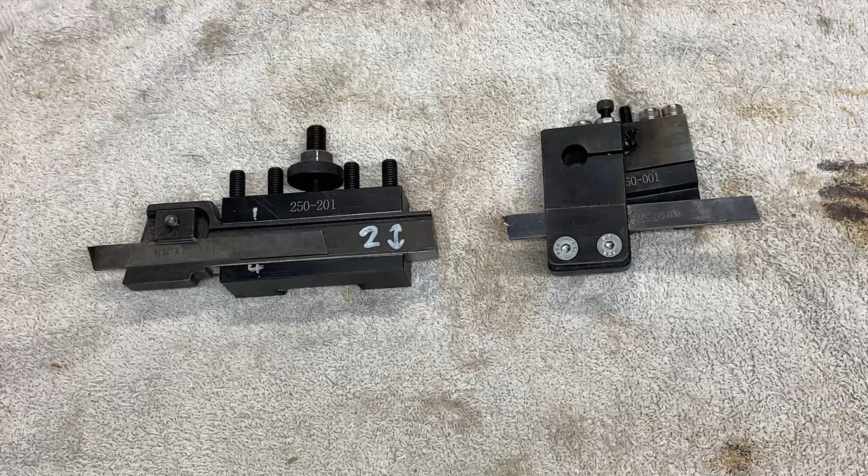Alright, back to the video and what we're doing today. This is my parting tool setup for my larger lathe. It's a made in England Eclipse parting tool holder with a parting tool installed here, and it all fits into a quick change tool holder.

Now I've got to say, this parting tool is absolutely hopeless. It doesn't cut, and I'm very cautious on how much I wind that hand wheel in on the cross slide, because if it does dig in, then I'm sure it's going to cause some problems. Now, I think the issue is the stick out here. It's a very long stick out, and I think there's probably some flex at the end of the tip, and that is why it doesn't cut into the steel that you're turning.

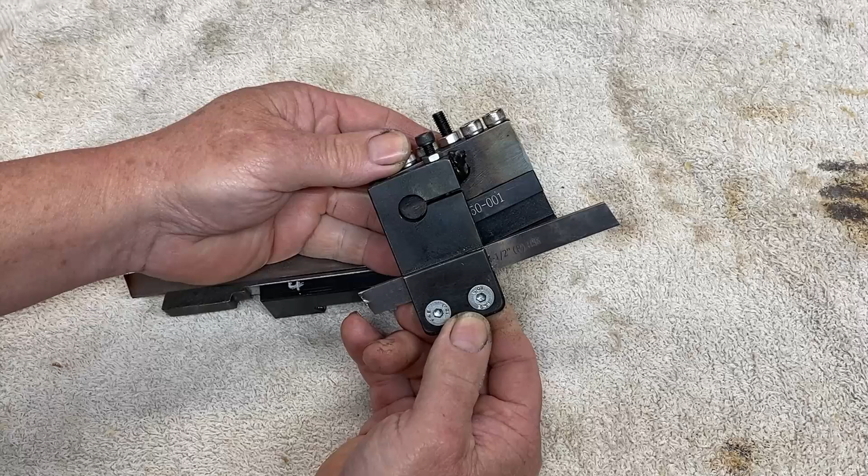This is my homemade parting tool for my smaller lathe, and I have to say this works absolutely perfect. This was a design from Mark from Winky's Workshop. I'll leave a link in the description. Again, it's on a quick change tool holder.

The unique thing about this one is it has this hole with a slit in here, and that gives the bottom piece some flexibility when you're cutting. So this gap here will close up when the cutting tool starts to dig in, and that cutting tool will then start moving away from the work, and then you don't get those dig-ins. A really good design, and as I said, this tool works brilliantly.

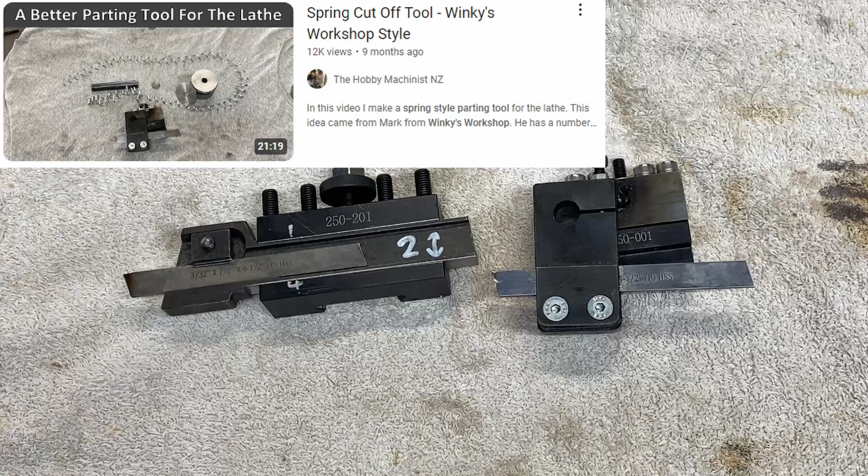I do have a video on building this parting tool, so I'll leave a link in the description below. So what I want to do is make one of these style tools for my larger lathe.

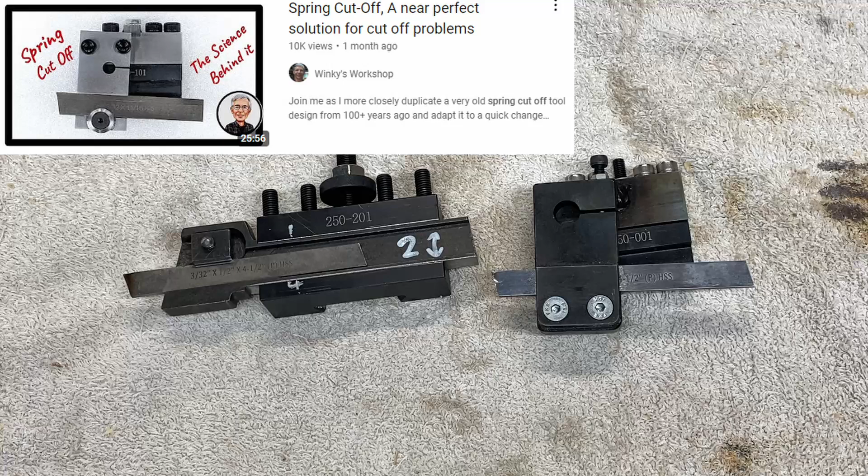Now it just so happens that recently Mark had done an updated video, and he did a lot of testing on different homemade tools like this and whereabouts that hole and slit are on the tool and how they perform. So he did a whole lot of experimentation, and he worked out the optimum position of that hole and that slit for the tool to work the best.

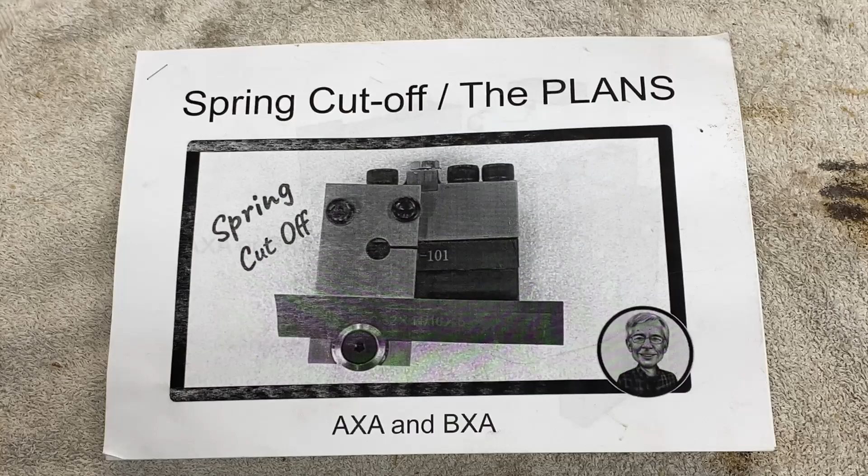Another thing is Mark provides the plans to build this tool for free on his website. So again, I'll leave a link in the description. The plans are all there. Unfortunately, I'm in metric, but that's not a problem. We can convert these measurements. So again, the full credit goes to Mark, and let's get on with the build.

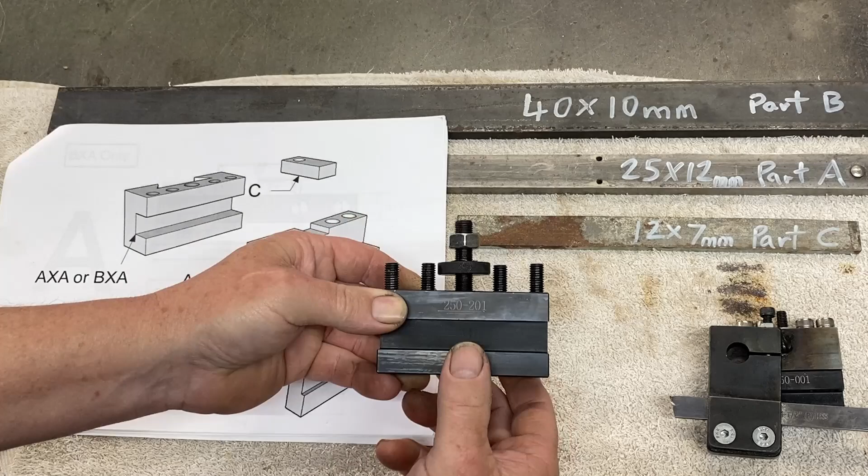I've sourced all of the parts and materials. This is a BXA tool holder. It's 250-201, and you can see here how much bigger it is compared to an AXA tool holder.

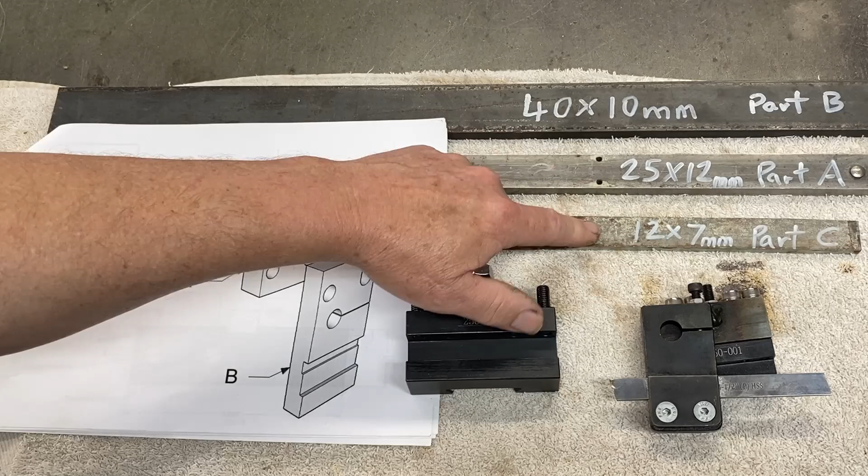Now the materials for the build, for part A, I have this piece of 25 by 12 millimeter steel bar. And for part B, I have this 40 by 10 millimeter steel bar. And for part C, I have this 12 by 7 millimeter steel bar. I need to make this a bit more narrow. It's wider than 12 millimeters.

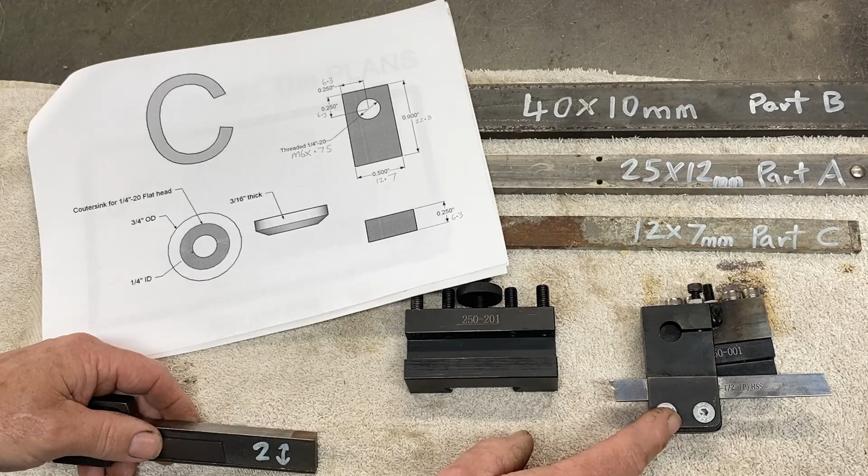Now, when we get to putting the blade in, I'm going to have to do this a bit different to what Mark's done here. And you can see I did something different on my existing tool holder. The blade I'm using is different to what Mark has, so I will probably have to work out what I need to do here once we get round to that part.

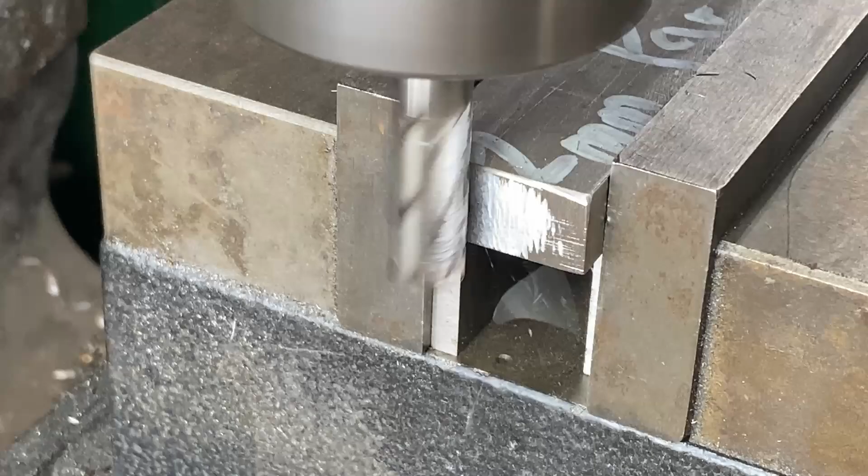I'm starting with part A, and I'm cutting off this piece at the end with a rivet in it, and I move across and cut off a piece slightly longer than what I need. The cut ends are cleaned up in the mill, and this is milled to the correct length.

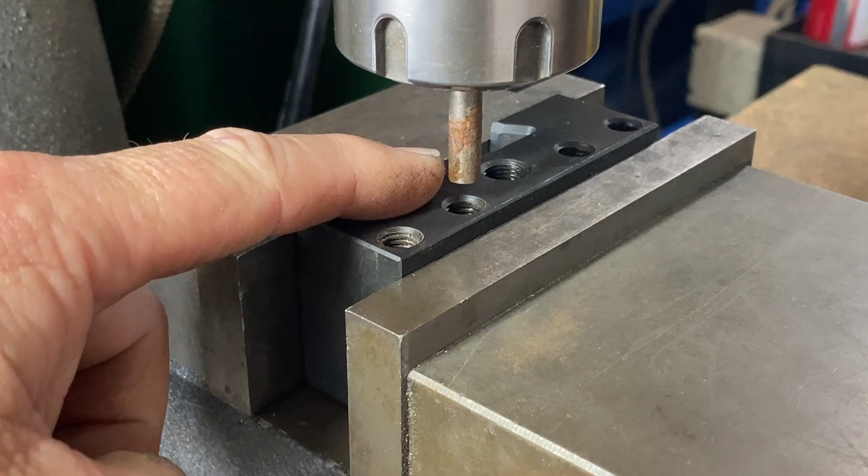I'm verifying the distance from the front edge here to the centre of the holes. Mark did not have a BXA tool holder, so he wasn't too sure on these measurements. However, his measurements were accurate, and I've noted them all down here in metric, so I'll use that for the next process.

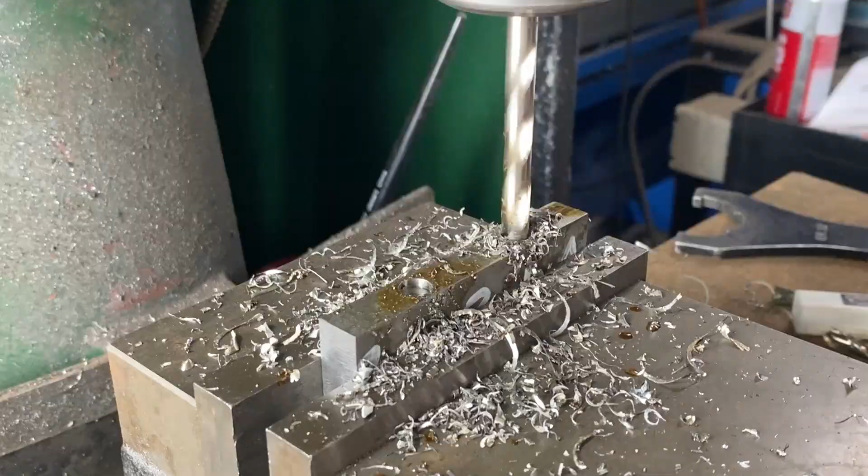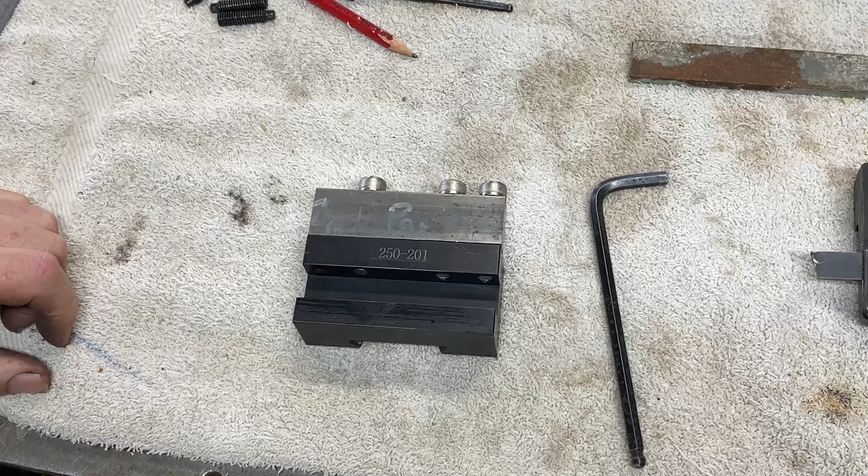The next step is to drill these 8mm holes, so there's 3 of them altogether for mounting onto the tool holder. I deburr the edges of the holes and bolt that onto the tool holder, and that came out pretty good. The next step is to drill and tap these 2 holes here. These will be tapped out to M8 given that most of my hardware is metric.

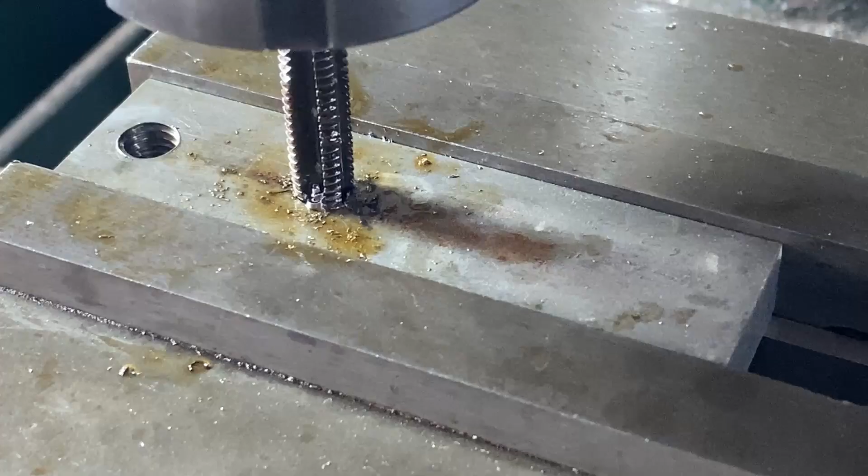Those holes are drilled out with a 6.8mm drill bit, and I like to start the thread in the milling machine by hand, then come back and use the tap wrench to finish off the thread.

This is the little slot at the top. The plan calls for a 1/2 inch slot, but I'm using a 12mm end mill here.

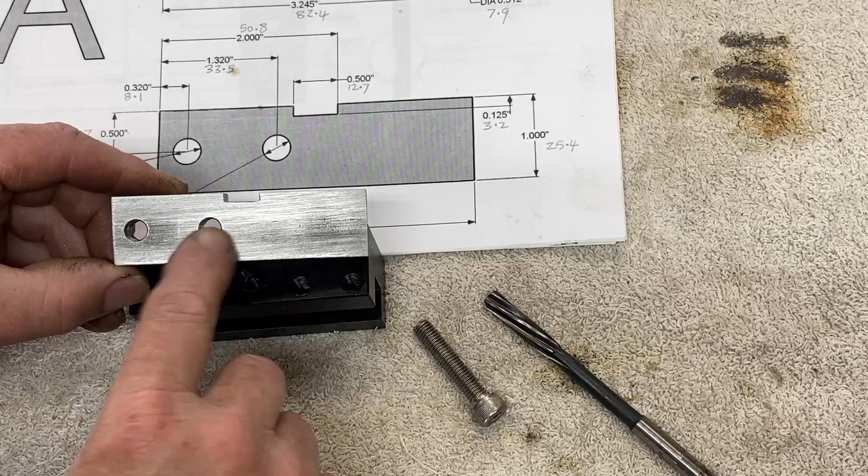That is pretty much part A complete. It's got the threaded holes, a little slot, and our 3 mounting holes on top. Now I did have a bit of an issue here.

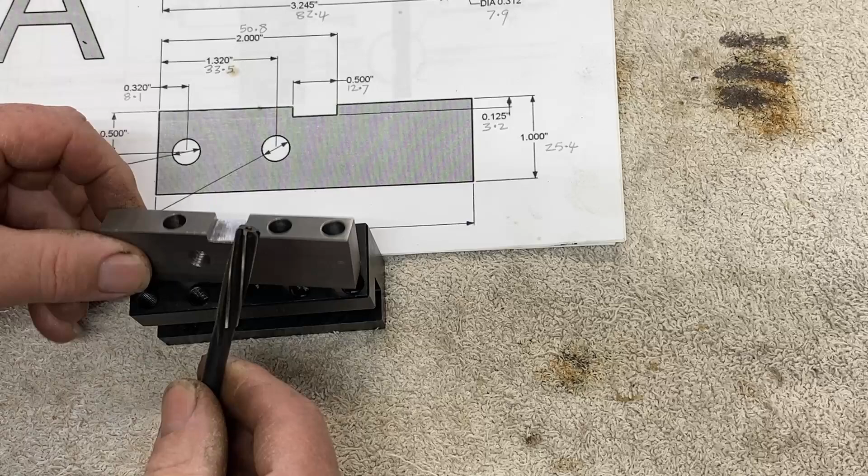That first hole, the bolt wouldn't go down there, and what I discovered is that when I threaded this hole, the metal got pushed into the hole a bit. It didn't break through, but it got pushed in there. So I had to run the reamer through to clear it out, and it still hasn't broken through, but now the bolt fits down there.

So perhaps with these measurements here, the second hole probably needs to be moved in another millimetre or so.

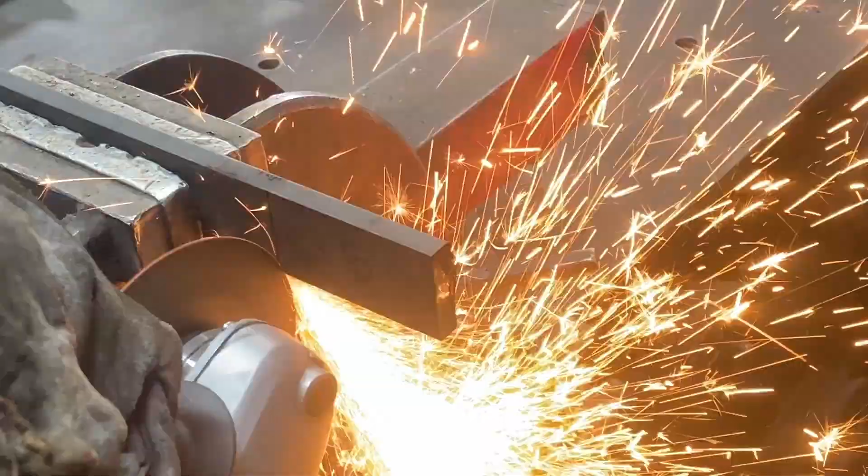I start working on part B, which is this 40mm by 10mm steel bar, and I cut a piece off to suit. This is hot rolled steel, and off camera I've tidied it up along the side so it can fit in the vise properly.

I've also used the edge finder and DRO to work out where these mounting holes go, and they're drilled out to 8mm.

The hole on the far side is lengthened with an 8mm end mill. The next step is to drill the hole that does the hinge.

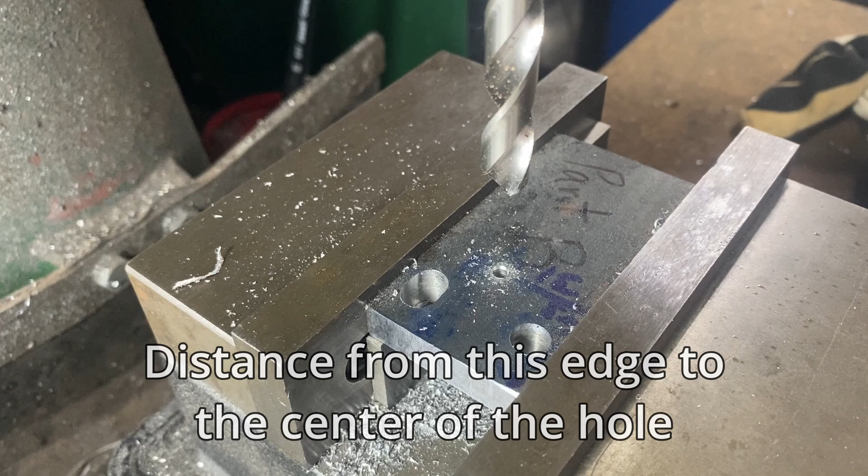In Mark's video he mentions that the 3/4 and 7/8 were the best ones. He recommended the 7/8, although his plan still had 3/4 there. Now I've center drilled this, and I'm going to use a 9.5mm drill bit to drill the hole, and I've marked the 7/8 in from the edge of the vise here, and that should work quite good, I think.

That hole is drilled out. We get a few fluffy things curling up on the drill bit here, so I need to turn off and clear those off.

I screw the 2 parts together.

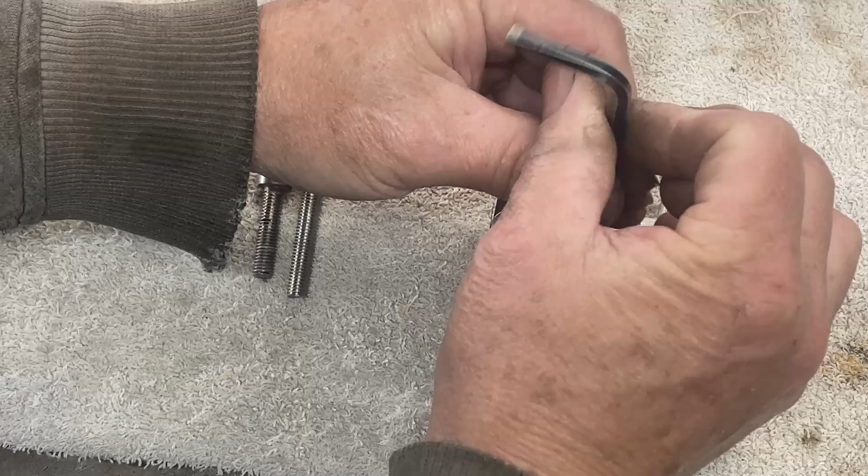Now I've modified these screws here. They were these countersunk screws, and I've put them in the lathe and flattened off the inside. That makes it a lot narrower so I can get closer to the chuck when I'm parting off. These cap head screws stick out a lot further.

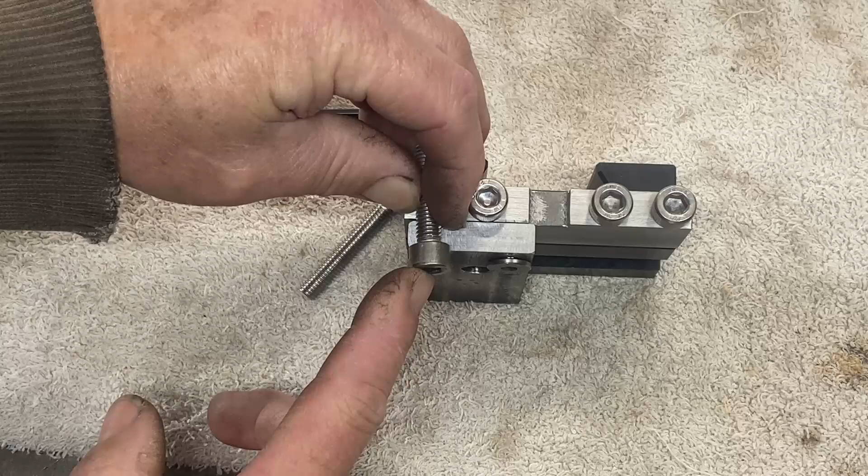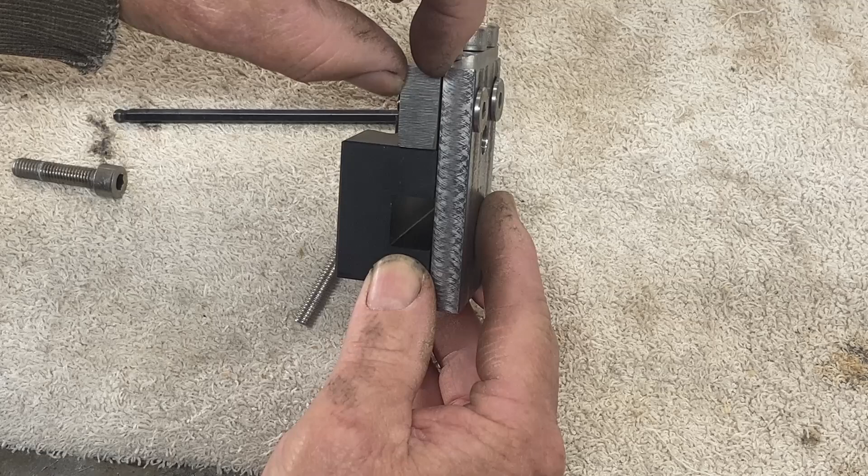I don't know if you can see it, but at the top here there is a gap between the 2 pieces, and I think that's because the piece I used on top was 12mm instead of 1/2 inch, and it is stepped in a little bit from the black part here. So I'll have to go and mill that down a little so the top piece is sticking out further than the tool holder. I'll do that later, but now we'll get on with milling the slot for the blade.

It's a simple setup here in the mill. I'm using a 12mm cutter, so I have to cut just a little bit wider because it's a 1/2 inch parting tool. And that fits in there nicely.

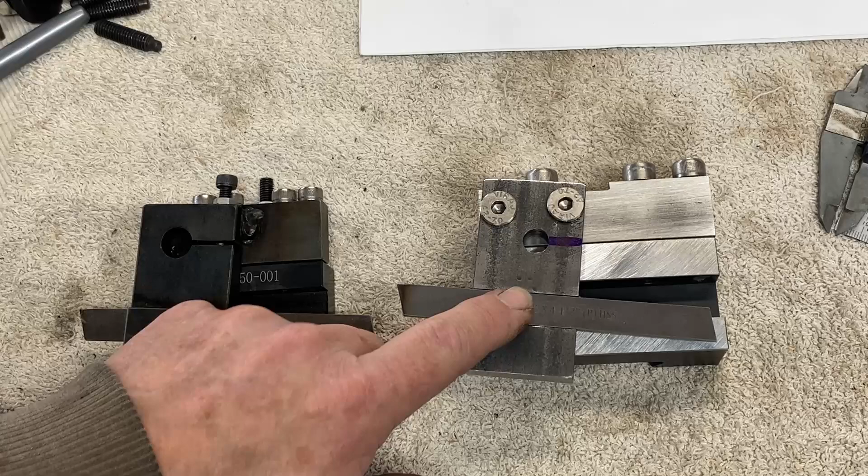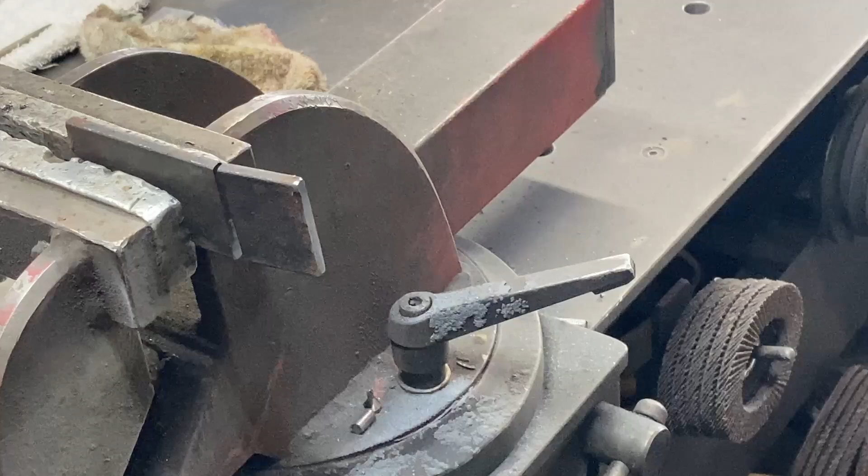The parting tool goes in the slot, and now we need to be able to retain it. I'm going to use this design here, a little cap that gets bolted on and pushes on that parting tool. This is 5mm steel bar, and off camera I've already cleaned up the edges so I can fit it into the vise.

You'll see here that it's only hanging in the vise by, I don't know, 2mm maybe. So it's a very scary setup, and I'm just taking very light cuts.

And I cut this piece out in 2 phases. These are just like 2 thou cuts.

Next I need to cut an angle of 3.1 to 3.2 degrees. So again, a bit of a scary setup in the mill. Very light cuts, and all I'm doing here is cleaning up the surface until it touches the other side, and that gives us the correct angle.

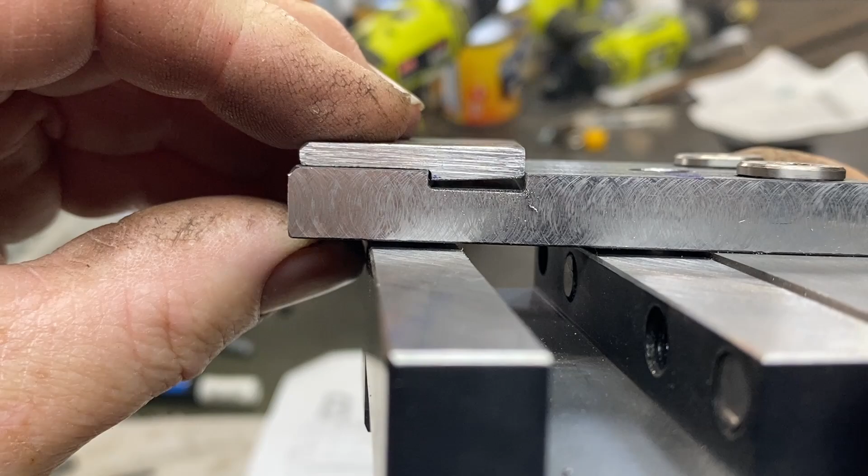The cap goes on there like that, and you can actually see the taper in the gap, and that's the same taper that we have on our parting tool.

That retaining cap needs to be bolted on, and I'm going to use these countersunk bolts. Now I've clamped it up and I'm going to put a tack weld on each side, and that way I can drill and tap all these holes and they'll all line up nice and perfectly.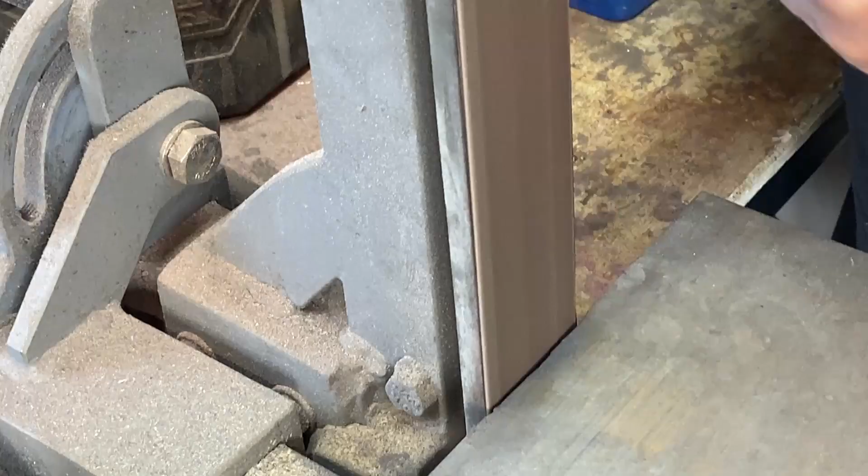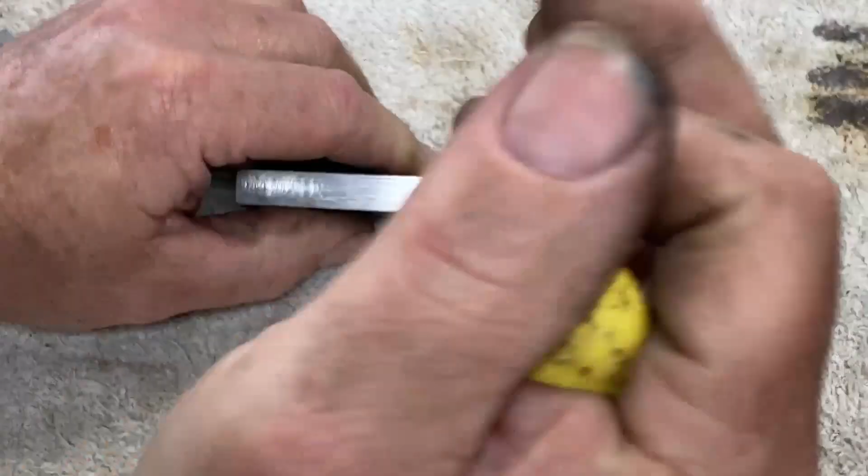Now I'm on the belt grinder. I'm grinding off those 2 tack welds so I can get the pieces apart again. It was a bit hard on this side, I couldn't get it apart, but the other side I managed to get it apart, and then that was able to break the other side as well.

I've rounded off the edges here and also on this part. Now the parting blade goes in, and there's a little shim I've made up here. This is 0.5 millimeter thick. It goes down the bottom here and puts more pressure on that blade.

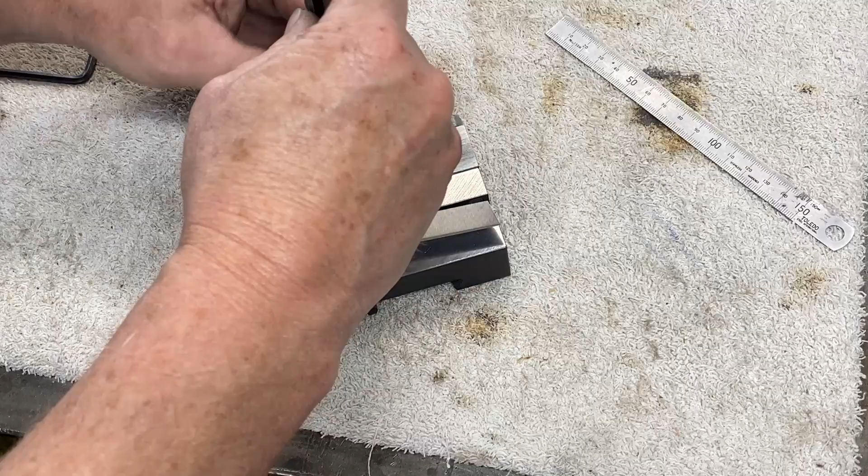That's all screwed together, and then I bolt that onto the other part, part A. That's almost done. The next step is to cut a little slit in here, and the last part is to make part C, a little piece that goes on top for adjustment.

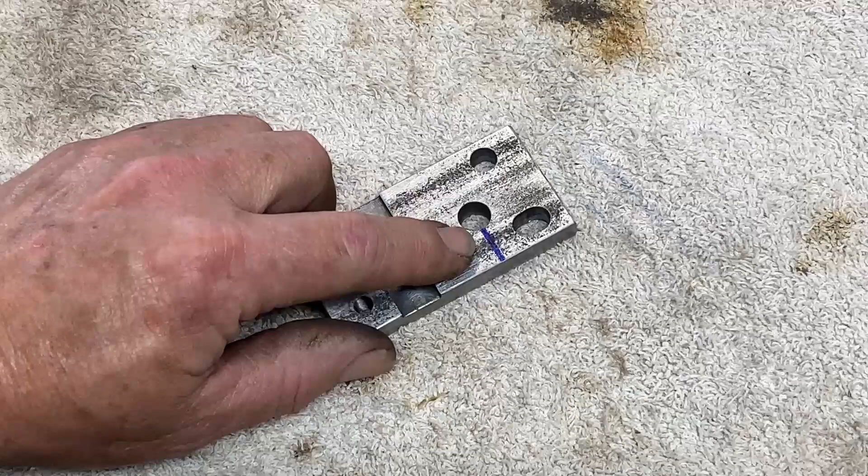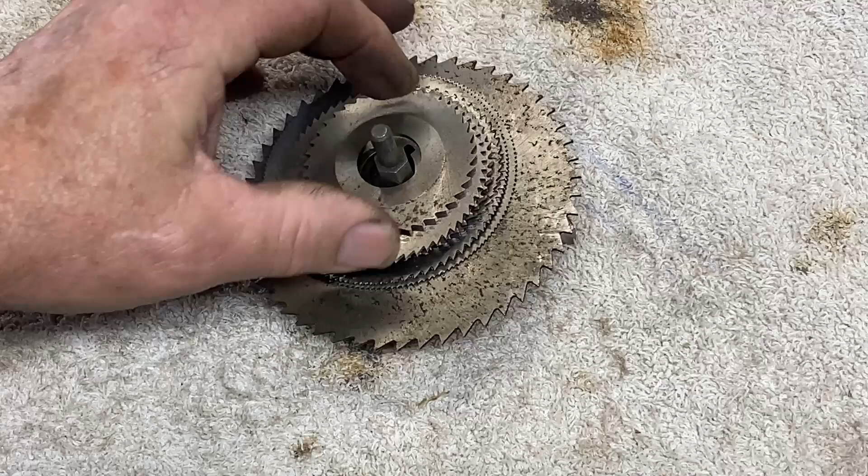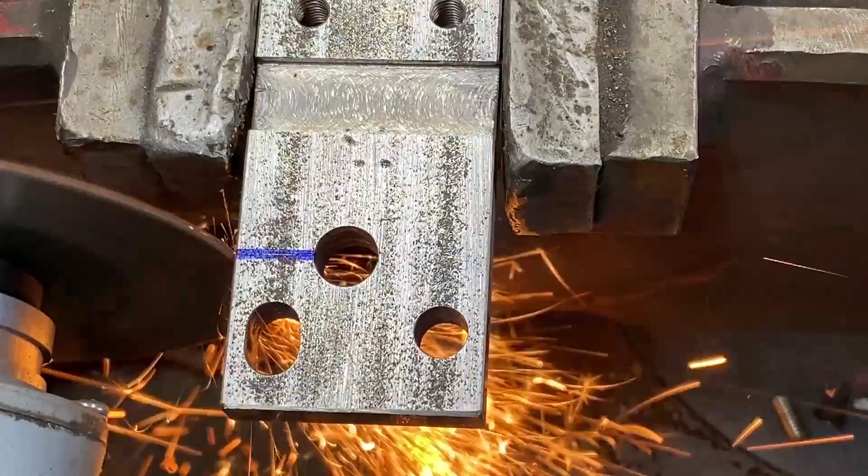There are a bunch of ways this little slit can be cut. Of course you can use a hacksaw, however Michelle from Rusty Knox would say that's pretty primitive. I also have slitting saws, but I don't have any arbors for them, so I'd have to spend time making one. Another option is... beautiful cut. That's the best option.

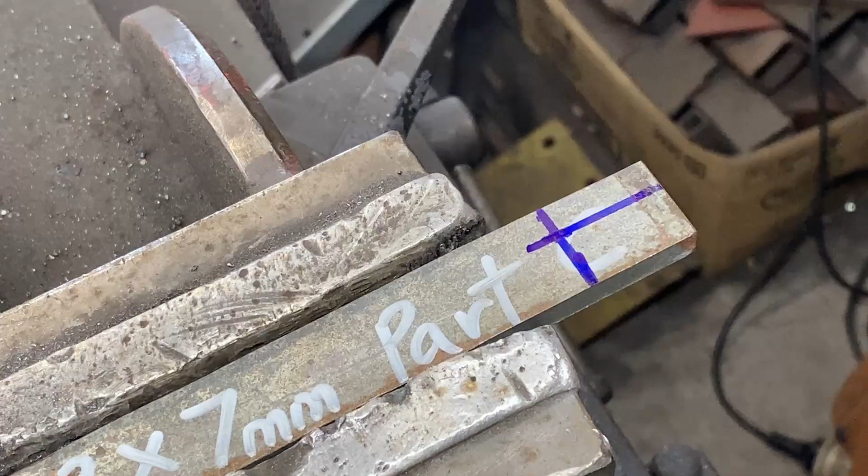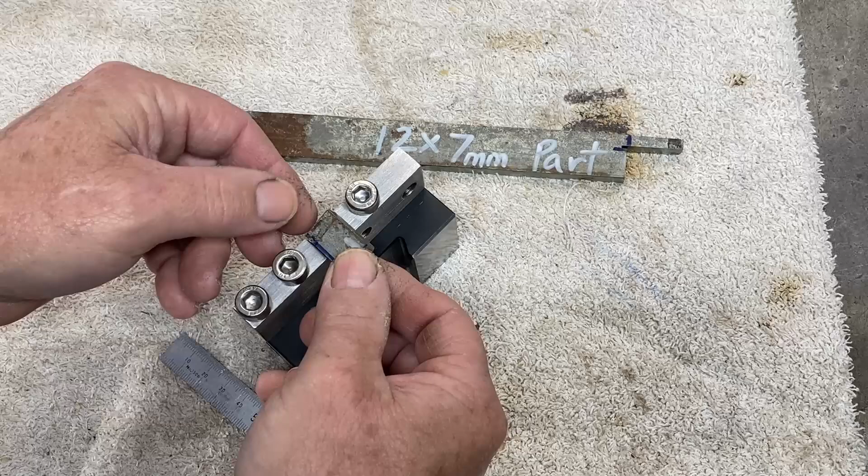Alright, we're on to the final part, part C. We cut a little piece out. This is the piece I cut, and it looks a little short. It fits on there quite good, but the thread is going to be right on the edge here, and it will miss the dovetail on the tool holder underneath.

I really need something 30 millimeters long, so I'm cutting another piece out of this bar. This one's cut a little longer. I mill down the cut edge to 12 millimeters to fit in the slot, clean up both ends, and finally drill out and tap for an M6 bolt.

I've rounded this edge here just for aesthetics. The bolt goes in like that, and it will sit there, and now the bolt will touch the dovetail on the tool post. So all we need to do now is add some welds in here.

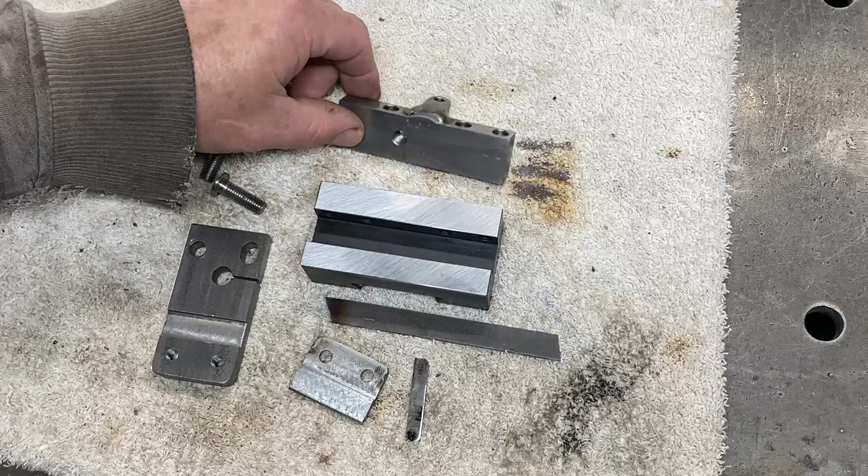The smart ones watching will notice I'm welding this piece on the wrong way - it should be poking out the other side. Yes, I had to come back with an angle grinder, cut the welds off, and re-weld it. That part is all finished, and I've welded this top piece on the right way round now.

I put this together and tested it, and I came up with a bit of a problem with this slotted hole. When I was using it, this whole plate started to shift backwards. The bolts were fairly tight, but obviously not tight enough. Now those socket head cap screws might be able to be locked down a lot tighter, but I'd rather use my slimline bolts.

So what I did in the end is rebuild the part again. The only difference here is that it's a round hole, not a slot, and it's in a higher position so that we get the natural angle we need for the blade here. The two bolts that bolt in here will hold this nice and firmly.

Off camera, I'm going to blue some of the parts with a bluing solution to protect them from rusting, and then once I get it all back together, we'll go test it out on the lathe.

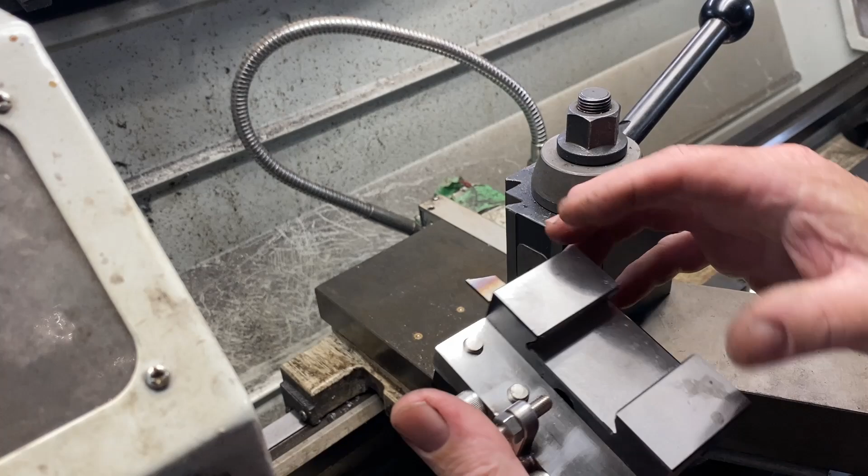That is the finished product, and I think it came out really good. I'm very pleased with this. Now, I did blue the tool holder where I milled it down, so that's nice and black, which is good. I didn't blue the silver bit at the top - I don't know what steel that is, but I've tried to blue it in the past and it doesn't take. But I did blue a couple of the other parts as well, so it looks pretty good.

So I've set up the tool height on center with this adjustment here, and that fits onto the tool post like that, and we're ready to go.

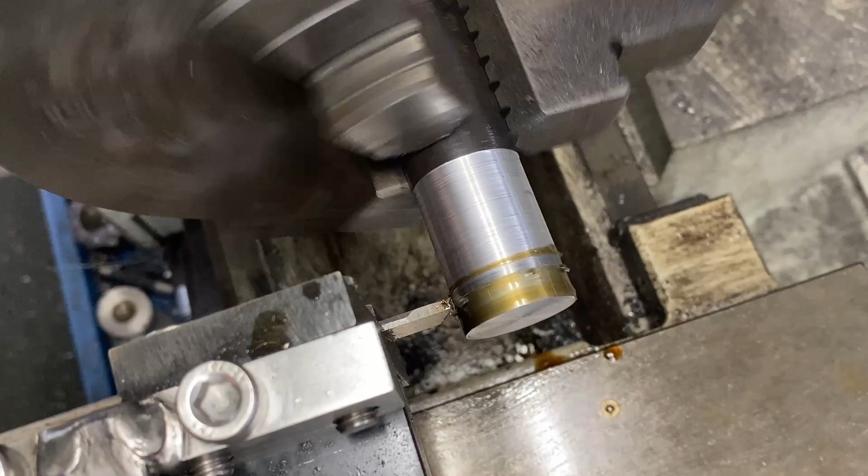This is about 25mm steel bar, about 1 inch in diameter. I'm using some cutting oil on a brush, and I'm sort of around the back of the camera, so it's a bit awkward. But anyway, the cutting starts off really well here.

I do have quite a slow feed here, so I'll speed this up a little bit and then we'll slow it down once we get to the end. It's always good to go back and put some more oil on the brush as well.

And there you go, that's cut off. That was a nice clean cut, so I'm pretty happy with that result.

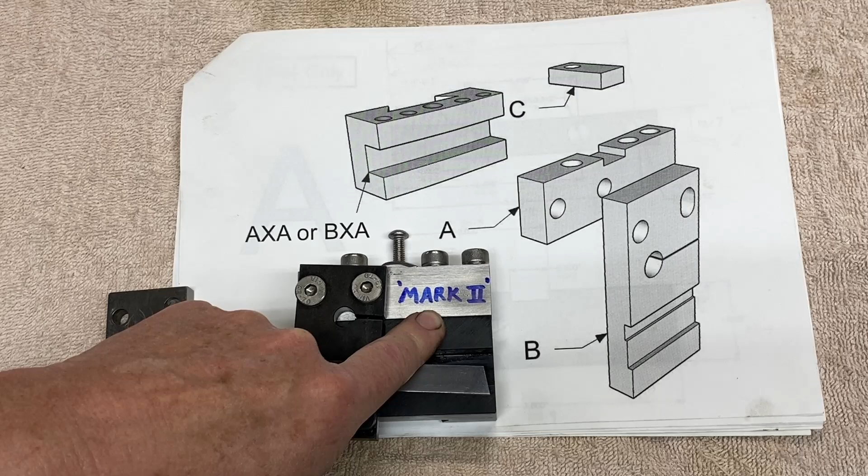I'm calling this the Spring Cut-Off Tool Mark II, and I use that name because Mark from Winky's Workshop invented the tool, and it's the second iteration of the tool that he's made after he did all the testing, hence the name Mark II.

Now I think the angle of the blade here is okay. It's not quite as steep as the angle on my smaller parting tool, but I don't think it's necessary to have the slot in here because you'd probably never have the tool in the horizontal mode. So drilling just a round hole at a different height will give you this natural angle, and that will have no chance of slipping under load.

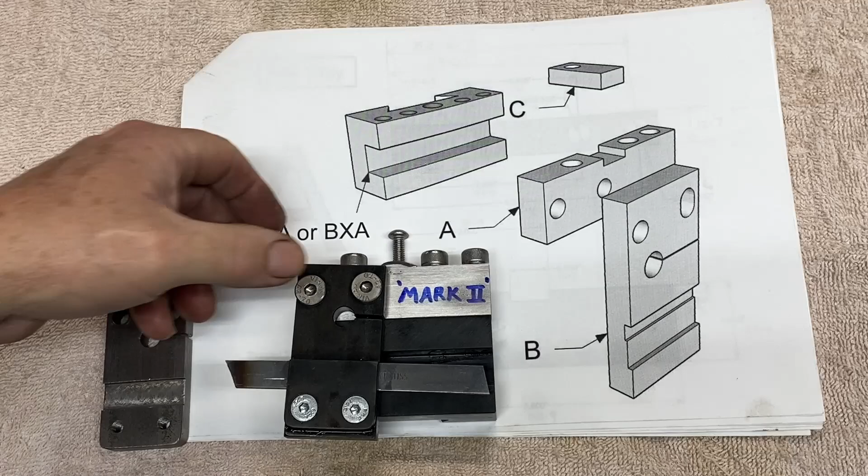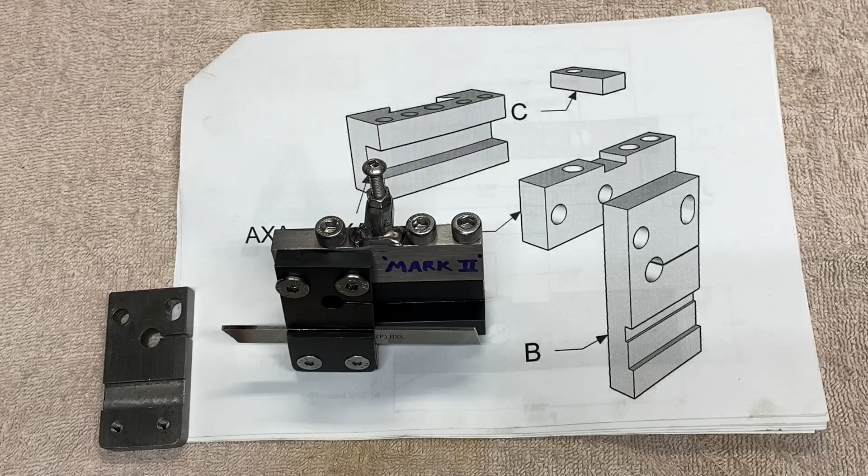Well, that's another project done, and as I mentioned before, full credit goes to Mark from Winky's Workshop. I do appreciate him sharing the plans with the community, and it's good to be able to build something from a plan, although of course I had to make a couple of changes, but everything turned out good in the end. Once again, thanks for watching.